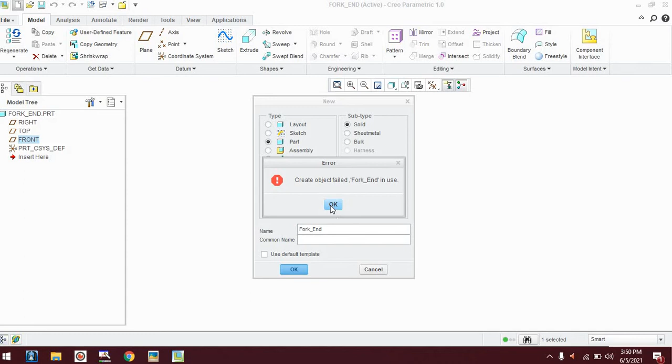So I am taking a new drawing with the file name fork end. I am not using a default template. Then press OK. So fork end 1, that's the part, and this is the MMNS part drawing template I use.

So this is the drawing screen. Here, my front plane is this one. So in that I am going to draw, because I am drawing the front view of the fork end.

Here, based on the center we can draw 2 circles with radius 14 and radius 32. So initially I am going to draw 2 circles. First circle, then second circle, and dimensions are - here it is diameter, here it is 32 radius, that means 64, and here 14, that means 28 diameter. So 64 and 28. We draw 2 circles.

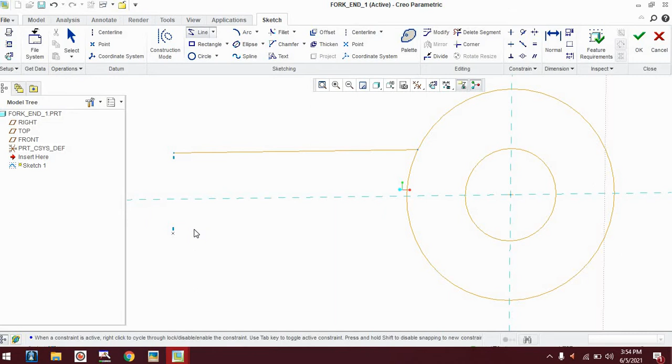There are some constraints in this, so I am removing this, and again drawing horizontal. This distance is 14. So we got two horizontal lines with the 14, and this distance from the end point up to the center axis.

This distance up to the center axis is 108. So this distance should be 108. This is the center axis, so this distance is 108.

So we can close this portion, and we can remove the remaining portions, and this area can be removed, and this area also can be removed.

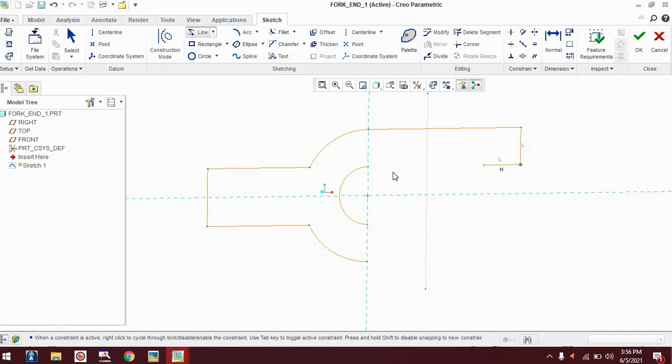So we got some portion of the fork end, and then after extrusion we have to draw a circle here. So I am extending this area further - vertical, then here. Similarly here also I am extending further.

So the front view of the fork end is completed. Then I can extrude this sketch. How much do I extrude here? It is given 28 rectangle, that means this dimension also 28. So I am extruding by a distance of 28. This is equal to 28. Then press OK. So we got this fork end.

Then in the top plane of the fork end, next I am drawing the circle. So in this fork end, I am giving some references.

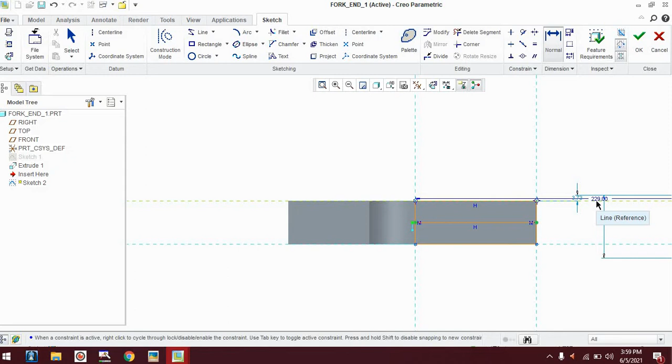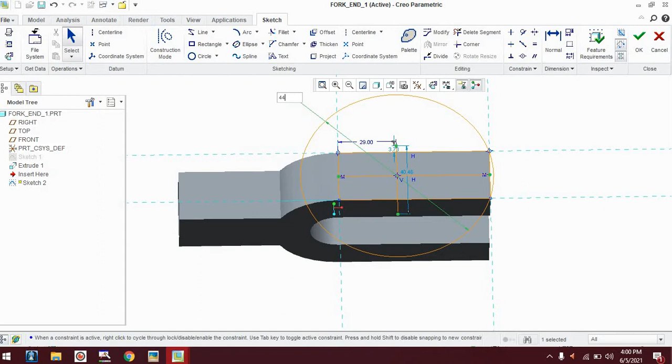Okay, so it has to extend a little bit, then only I can accommodate. Sorry, this is 48 because this is the diameter. So this is 48 now. Okay, so this is my circle.

So after that I remove the remaining components. Actually this is not good. So this is my circle. Okay, so I have the remaining portions. So next I am going to extrude the circle.

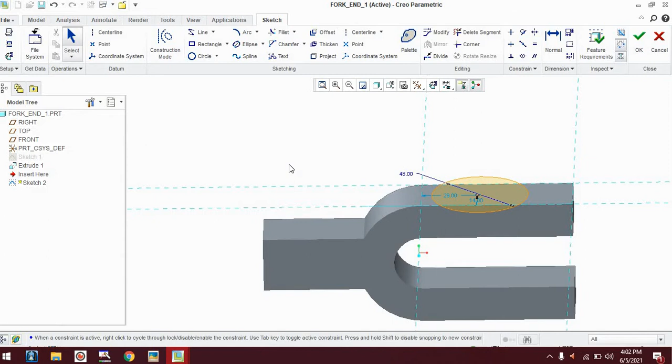So then I can extrude the circle, and the extrusion is 18. Extrusion in the reverse direction by a distance of 18. So extrude. Then after that I have to remove the extra portions from here.

For that, again sketch, then make all the edges as reference. Then draw the portions which we want to remove. Then we have a circle. So there is a circle. Okay. Then remove this area.

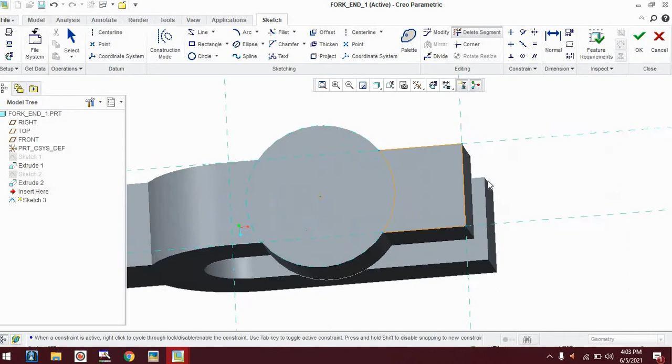So this portion we can remove. Then remove material in the opposite direction. So the bottom portion also can be removed by extending. You can remove the bottom portion also.

Okay, then this portion, this extrusion can be mirrored. This portion can be mirrored with respect to the plane. Here the top plane is the mirror plane. So use the mirror option, then take the reference is, select one item, then...

So again the extrude, this is going to mirror, select mirror, so I mirror the portion and I got the fork end.

So after that here we have some fillet. So in this I am giving some fillet by a suitable value. The same thing also can be... no, not possible.

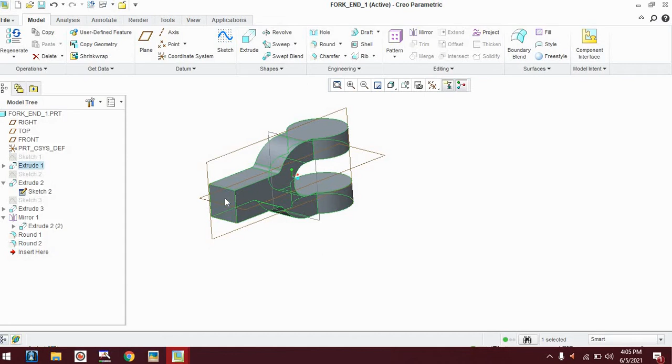Then in this end here we have an octagon shape, so we have to create an octagon there. So select this area, sketch, then here take all the planes as reference. So when we select the reference, it turns to blue, then only we can pick the exact edge.

Then from the palette we can take the octagon, drag and place somewhere, then press OK. Then using constraints, coincide constraint, select the center and select the center of...

So here the center is not given, so how to draw a line, it should be a construction line. A construction line is drawn to find out the center.

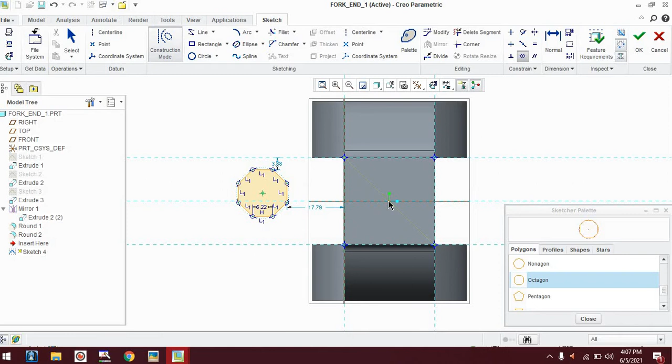Then use coincident, so I coincide into the center, then coincide this edge and this edge. So there is a constraint, so this dimension is not already given, so we can delete that dimension.

So we got final octagon. Okay, so we got this octagon.

Then we can... actually for drawing this one we have to remove this portion, so draw a line here connecting the corners.

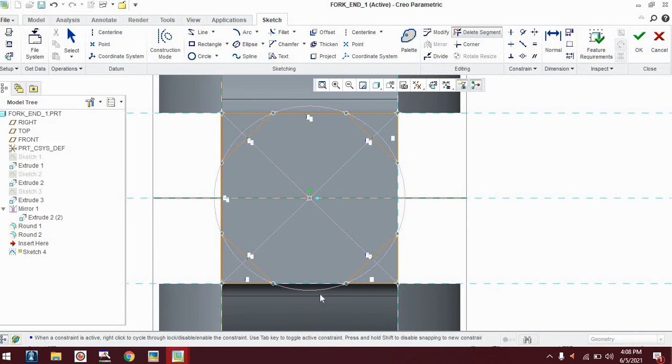Then remove the unwanted lines. So here we don't need this one, this one, this one, and this one is not needed. Okay, and this one is also not needed. So we need only the edge portion for drawing. So we got this edge portion.

Then we can press OK. See this, only the edge portions are selected. Then we can do extrude, so we can see clearly. So this is the only edge portion. So then we can do extrude cut.

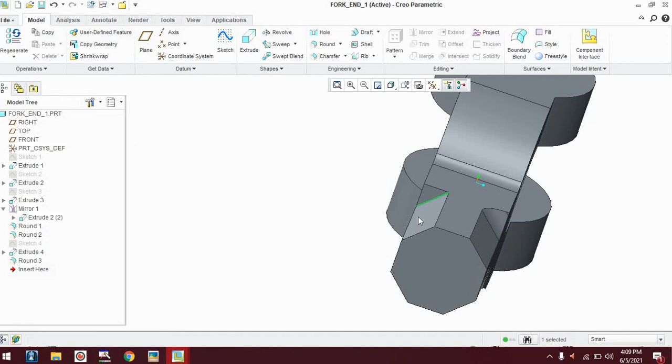And how much distance? This is up to 30. So 30 distance, then press OK. Then in this area I am giving a round fillet up to this 5.10. Then here also select this edge, okay, it turns to green, then 5.10.

Okay, so we create this portion, and if we need we can extend this some distance of shaft also by drawing a circle. So here also we don't know the exact center.

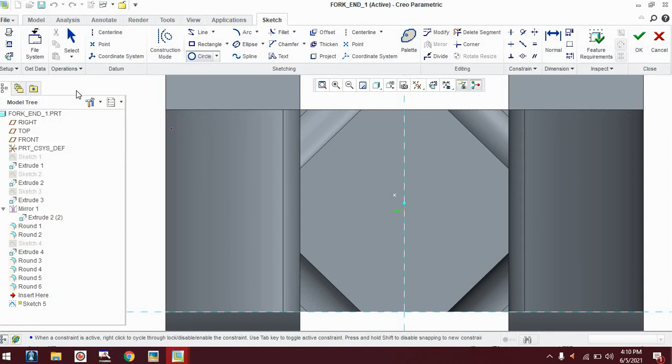To draw the center, we have to draw a construction line, so that is also not given. So one more reference is required. Okay, so draw a line here, a construction line. Then from this we can find the center. So this is the center.

So then I can draw a circle here, and this circle is actually this much.

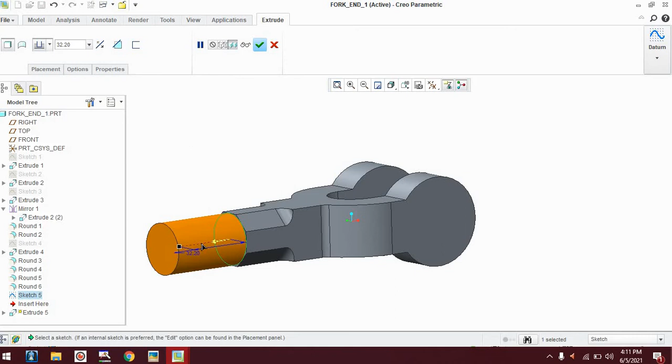Extrude by some distance not specified, then fillet this edge by pressing Ctrl. Then we can do the fillet operations here.

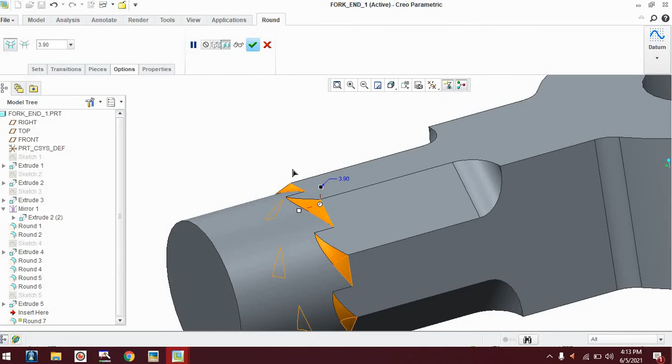Computer is a little bit slow. It's not clear. Okay.

So after filleting, we completed the fork end, and here at the center we need a hole for inserting this pin. The diameter of the pin is given as 24. This is the end of the pin, so diameter is 24, and we need to drill a hole here.

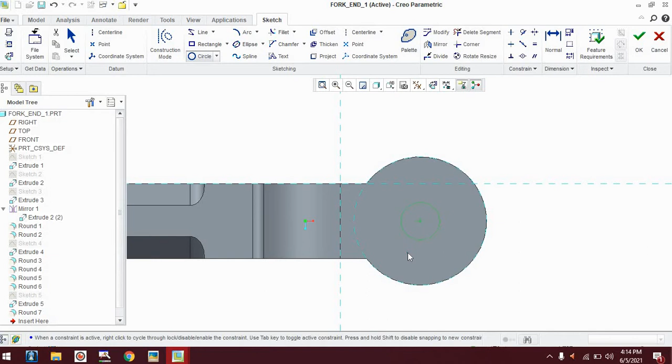Sketch. Take this as a reference, then only we can identify the center, then draw a circle with the diameter 24. Diameter is 24.

Then press OK, then extrude in the reverse direction, the total distance. Here we can give it up to the next surface. Sorry, intersect with all surfaces. So we finish this fork end.

Then we can save this document - in desktop, or in my documents. We can save this document, or in desktop, or we can create a working directory. Here I am not creating any working directory, so it's saved. The fork end is saved. Next one is again a part - Eye End.

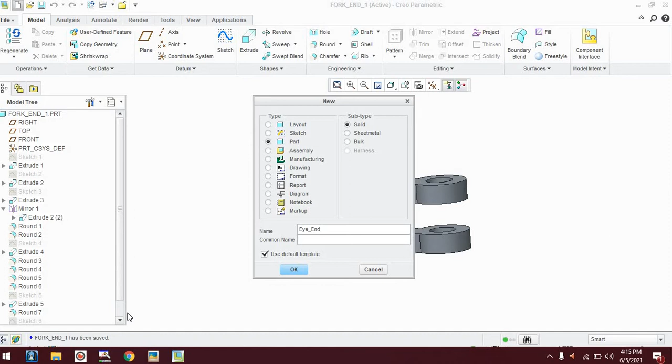Not using default template. You have to use the same template throughout the assembly, then only the dimensions are correct. Then here, select all. Then in this also I am going to draw this front view.

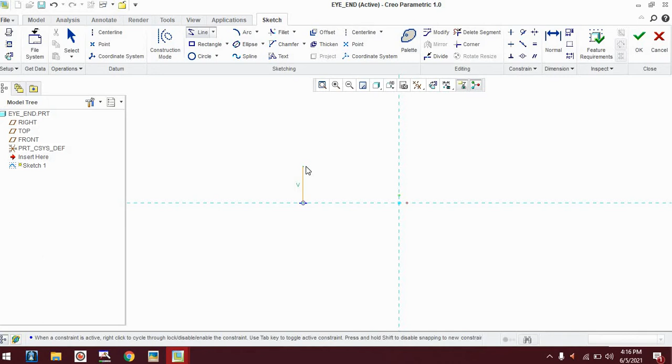So that is a 28 distance, sketch on the front view. So here the total distance, from center up to center, is 96. So we can draw a rectangle with 96. So I am taking this as a reference.

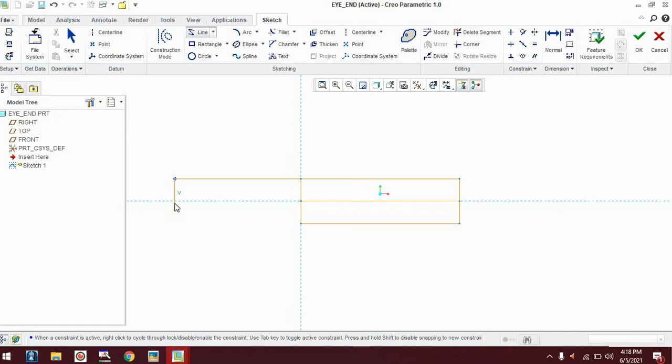Then press OK. Sorry, there are some extra lines - edit definition, so you have to remove the center line. Then only we can extrude. Press OK, then extrude by a distance of 28. Here also it's 28, so the 28 distance extrusion is over.

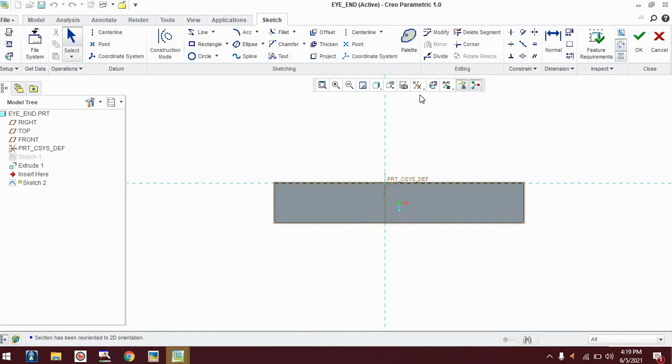Then in this top plane, I'm going to draw a circle. So here I don't know the distance.

Actually the center line is here - I think this is the center line, but we can measure it. What is the distance between these two points? 96. Okay, fine. So after 96, we extended some distance where I am drawing. So at this 96 we have to draw a circle.

So at the center we will draw a circle. I am drawing a construction line here to find the midpoint. Then change to construction mode and draw a circle with the diameter - even this diameter is also 48. This diameter is also 48. Diameter is 48.

Then we can extrude this in the opposite direction by a distance of 28. This is also 28, this distance is 28.

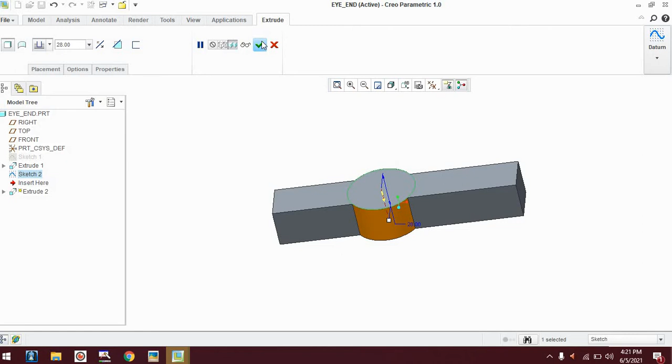Then again draw a sketch here to remove the remaining portions. Make all these points as reference - we have to make this as reference, then only you can pick the exact points along the line or along the circle. Then draw the line for removing this extra portion.

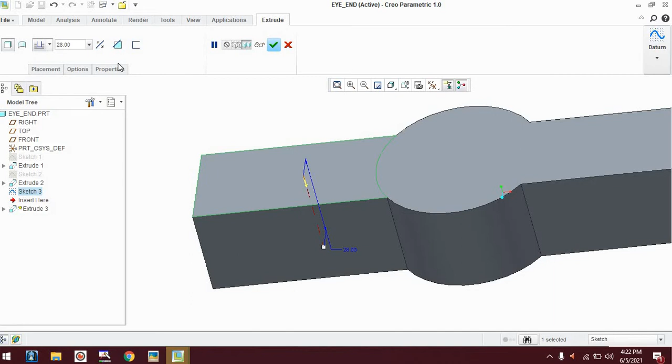Draw a circle and remove this area. So we got this area, see this. So we can remove this by Extrude Cut, up to 40. What is the thickness? 28. So we remove, and we got this portion.

Okay, and here again we have to draw an octagon. So take this plane, sketch, and again make all this as reference. This is the reference. Then draw a line to find the center.

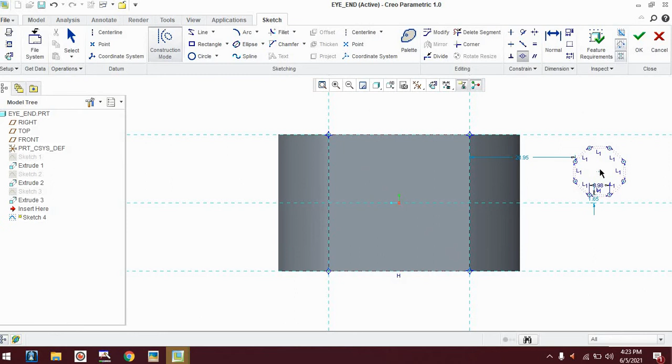Okay, it's a construction line. Then after that, take from the palette the octagon, drag and place here, then press OK. Then take the center, go inside and select this line. Again select the center, go inside this line, so it comes at the center.

Then again, okay, one thing is switch off this - first remove the construction mode, then only we can draw. Then again take the octagon, then press OK, then take this and select any of the lines passing through the center.

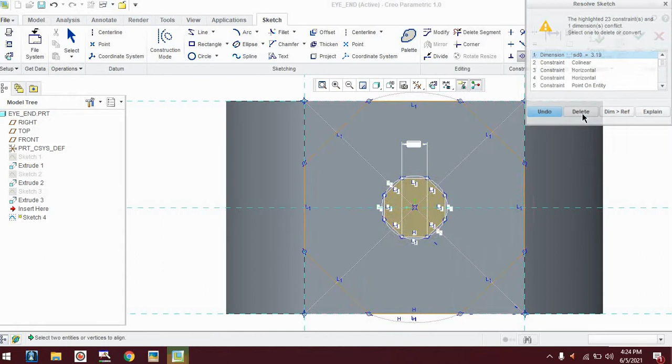Okay, sketch this place. Again take the center and take the opposite line, just come at the center, then select this line and this line. So there will be an error confliction, so delete these dimensions - we do not specify the dimensions. Delete the dimensions, so we got the octagon here.

Then draw lines at these corner points. Then maybe we can remove material from the corner points.

Then remove the segments. So we got 4 corner areas. Then press OK, and again remove material.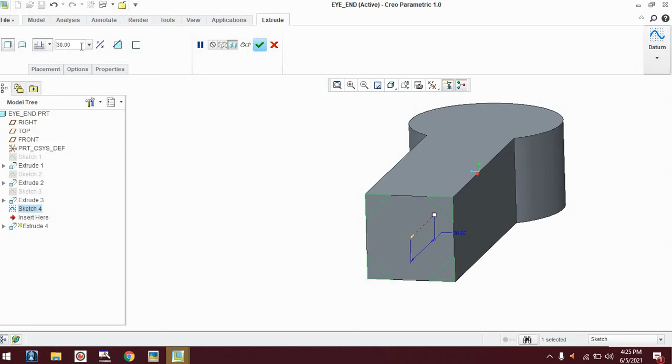Extrude in the opposite direction. This distance is 30, so give 30. Remove material, 30 distance. Press OK.

Then take these 4 edges by clicking Control. You can select 4 edges together. Change to green. Then round it. Oh, it's not possible. Okay, round.

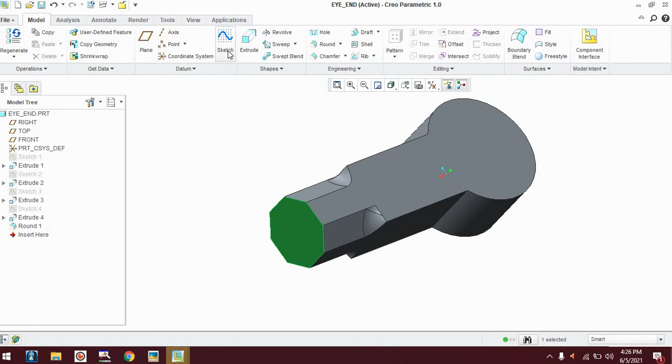Then the distance is 6.10. Okay, 6.10. Then again select this plane. Then we are going to draw a circle. So here also we have to find the center. Make this as reference.

Cross line here. Then draw a circle here. Okay, and extrude up to a distance.

The distance is not specified here. Then on the top area we have to drill a hole. Sketch. So the dimension of the hole inside this will be equal to the diameter of the pin, that is 24.

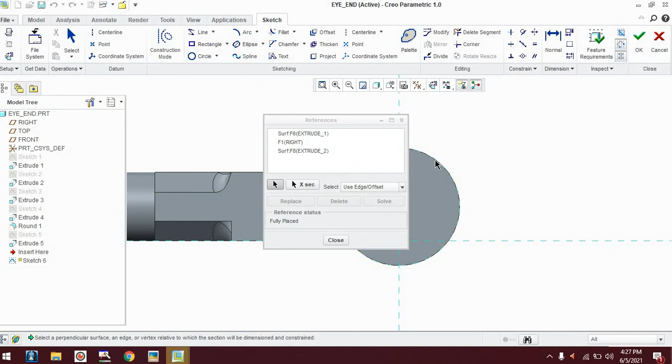So here again make this as a reference. Change to blue color. Then select the circle. This is equal to 24. Press OK.

Extrude. Then extrude cut in the reverse direction, up to next surface. Okay, so we got the second component. End and save the next component.

End, again I am saving in desktop. Second component is over. Third component is the collar.

Again new document, part, default template. It's not default template, then here I am taking this. So throughout the assembly you have to select the same template.

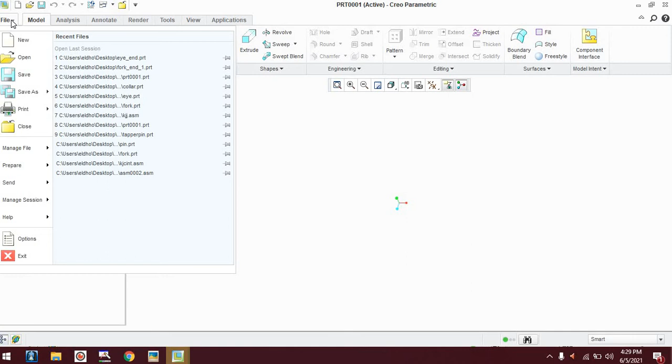So here in this I am going to draw this one. Okay, this pin - sorry, not collar, you can draw the collar. Okay, so I forgot to give the name. It's not possible, so I am taking a new drawing. So closing this for collar.

So here I am taking default MM as template. Then in this collar, this is actually I am drawing the circle which is the top view. This is the top view. So I am going to draw a circle in the top plane.

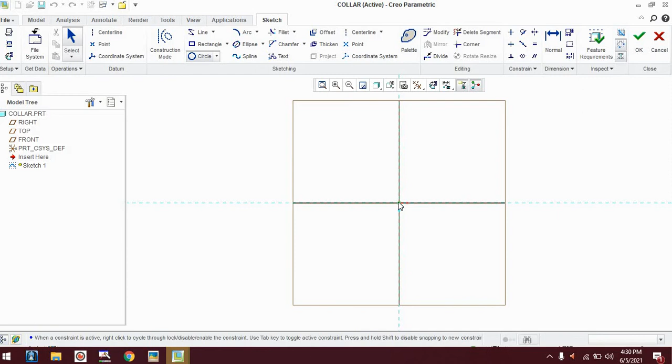Sketch in the top plane. So the circle diameter will be 36 outside diameter and 24 inside diameter. 36 and 24. This is 36 diameter and this one is 24 diameter.

So we got two circles. Then extrude, and the extrusion distance is 12 mm thick. 12 mm thick. So we got the collar. Save again, collar part. Collar is saved.

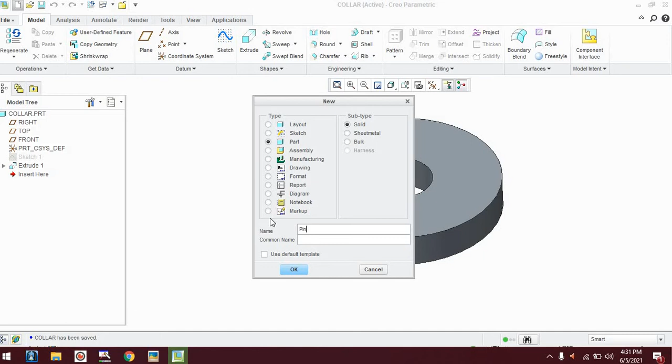Next part is again sketch pin. Pin. Okay, then select the template. So in the pin again I am drawing this top view.

So this is 24 diameter. Pin is actually I am drawing. So take the top view, sketch. Okay. Then to extrude to a distance, we have to calculate this distance.

And the total distance is equal to 6 plus 12. Total dimension of the length of the pin is equal to 6 plus 12 plus 18 plus 28 plus again 18, plus this is 12 mm, so 12 - total 94.

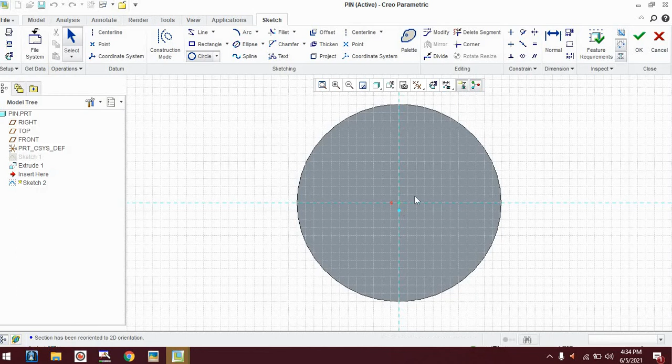Then at this end we are going to draw the head. Sketch, and head is also a circular one. See this head with the 36 tall thickness. So draw a circle with 36 diameter, 36 diameter, and extrude.

12 thicker in this direction, 12. So we complete the pin. And one more thing, inside the pin we need a hole for this taper.

And that taper is 5 mm, 6 mm thickness. So we have to calculate this taper dimensions. For that,

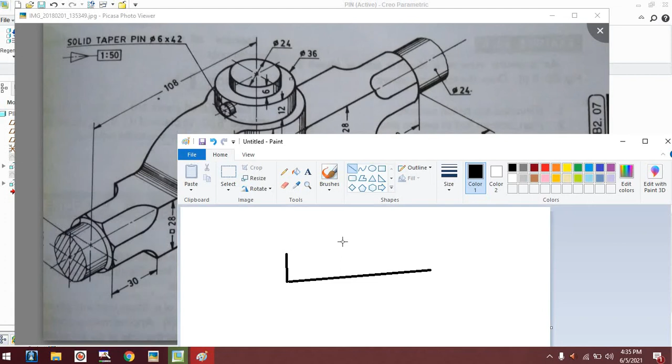So this is my taper pin. I'll show the cross section of the taper pin. Okay, this is the taper pin, and here the diameter is given as 6. So this is 6, and the length is given as 42.

This is 42. And the smallest diameter we have to calculate from this ratio, 1/50. The formula for this is capital D minus small d divided by L equal to the ratio, that is here 1/50. So 1/50. Okay, so here capital D is given 6, and length L is 42, and small d is what we have to calculate using this formula. So by calculation we found out that this is equal to 5.16.

Okay, so for this taper pin, 6 and 5.16 are the dimensions. So we have to make a hole with the lowest dimension. Then only we can make a mating with the interference joint. So here I am making a hole with 5.16 diameter.

So here, what is the distance? Actually the distance should be at the center of this column. That means here it is 6 and this is 12. So half of the 12 is equal to 6. So 6 plus 6 is 12. So from the top, 12 distance.

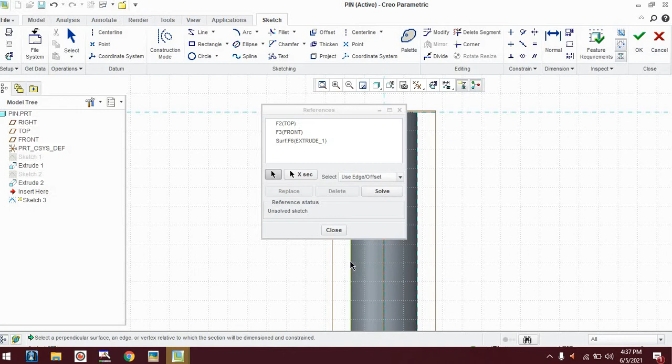So for that, here I have to draw - first check the available planes. So here, passing through the center, we have a plane. So in this plane I can draw a circle that is passing through the center. So again, make the references, cross, then draw a circle, and it is 5.16, the smallest diameter, and this distance is equal to 12.

Okay, so we draw a circle at the center, then extrude in both directions. Here we have an option to extrude in both directions and remove material, and the diameter is 24. So here, 24. We got a hole here.

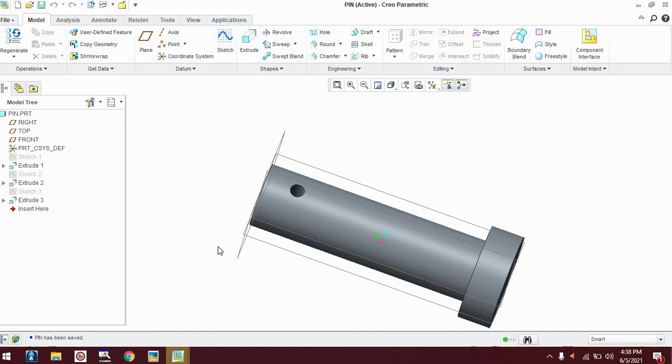Okay, so we complete the pin also. Save again in the desktop. Save the pin. Then one more component, that is a taper key, taper pin.

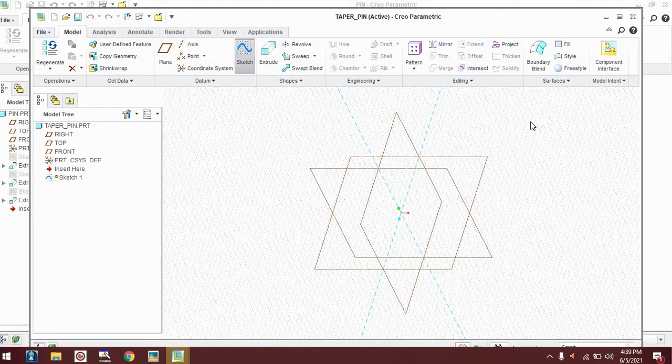Okay, so space is not allowed, so we have to give underscore. Then again the template. So here I am drawing the side view, I am drawing the circle, which is the side view. So take the right side plane, sketch. You have to select the proper plane for the components, because during the assembly process these planes actually intersect.

So we have to select the proper plane from the drawing. Coming to the taper, already explained. Maximum largest diameter is 6, smallest one is 5.16, based on this ratio, taper version. So this is equal to 6. And okay, then

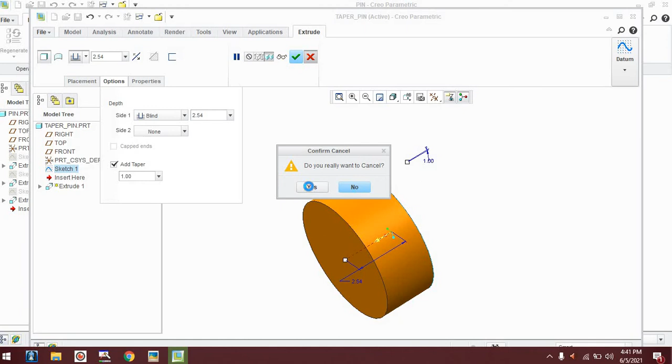Extrude. There are different options available. Here we have an option for tapering, but add a taper, and here it is angle. So using this formula the angle is not given, so I am using a separate method, another method for drawing.

So here I am drawing this taper using revolve. I am drawing this front portion. Okay, so take front plane, sketch. Then I am drawing the front area of the taper, and using the revolve feature we can make the taper. So this is equal to 6, half of 6, that is equal to 3.

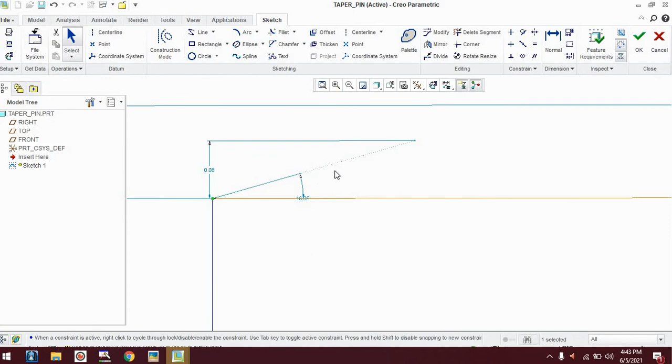This is half of 5.16, that is 2.58. And then this is 42, and here I am drawing, sorry. Okay, here I am drawing a line with a dimension. So here it is 3, here it is half of 5.16, 2.58. Then draw a line connecting these two. So it's actually a tapered one.

Then we can revolve. We have a revolve feature. Revolve. So select, sorry, forgot to give the center line. So edit definition. We have to give the center line also. So this is my center line. Then only I can revolve.

So we give the center line. Then we can revolve, see this about the center line. We revolve, and this is actually a tapered one. See this, this is the higher end, and this is the lower end. We save the components, so we finish all the components.

Then we are going to make an assembly. So in this, here this is the assembly, and this is a knuckle joint. And here again I am using the same template for assembly. So this is the assembly window, and in this window, using this icon I can retrieve the components.

So from the desktop, first I am calling fork end and open. So this fork end actually, here also we can give the plane also. So this is the plane. Okay, we finished, press OK.

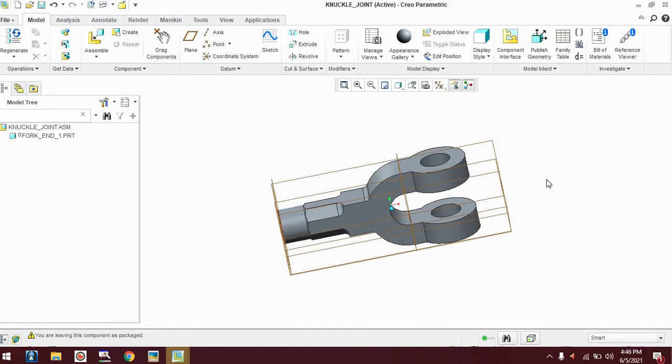First component is okay, now mating. And the second component I am calling is eye end. Eye end, open. So in this end, here I switch on all the axes. So I am going to mate the center axis of this end with the center axis of this fork end. So here we can see the center axis of this end. Click on the center axis of the eye end, then click on the center axis of this fork end.

So then the default one is distance, but here I am giving coincide. So here we can see some of the constraints are applied, the degrees of freedom are constrained, so it can move only in this direction, and the rotation. This rotation is also possible. Here I am not constraining this rotation because in knuckle joint application some flexibility is allowed for this rotation. So I am not constraining this rotation, but we have to constrain this movement.

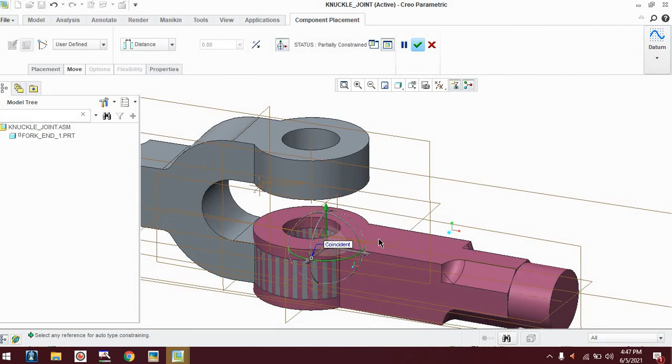For that, select this plane and the inner plane and give the coincide. So it automatically selects as coincide. So it's fully constrained, but we provide some rotation. We are not removing the rotation degree of freedom. Rotation is possible between these two components. Then press OK. So we mated the second component. Then the third one.

This is the pin. This pin also we can mate with the axis. Select the axis of this pin and select this axis, and here again the coincide command can be used. So here we can see the pin is moved, and only this movement and rotation movements are possible.

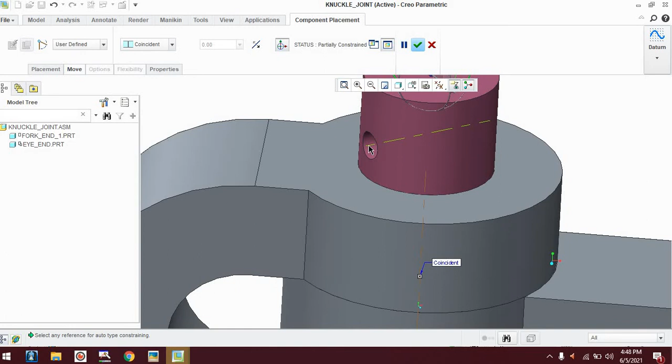So here I am rotating. We can constrain this rotation by selecting this center axis and the center axis of this shaft, and make this parallel. Thereby we can remove this rotation, see this rotation is arrested. So only the possible movement is this one, and that is also arrested using coinciding these two planes.

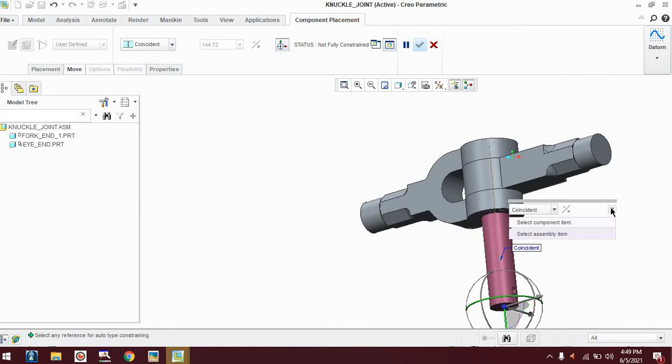I am giving coincide. Sorry, it's reversed, so we have to remove this. To remove any mating, just double click here and remove these two matings. So this movement is possible, and by removing this, it is also removed.

So again we can create a parallel mating between two components, oriented so this changes to parallel. Then we have to give the constraint for this. Select this plane, select this plane.

Maybe this plane, sorry, pin edit definition. There's some problem in this parallel mating also.

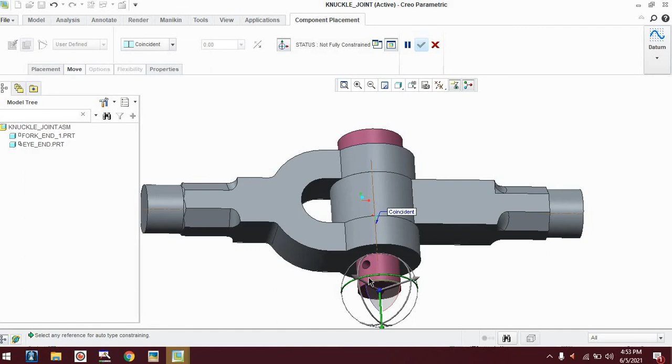So we have to remove this again, because when it's fully constrained, we cannot do any other mating. So initially we have to do this mating, we have to arrest this. It's not compulsory, but it's okay for proper positioning. So we can select perpendicular. Always it will be perpendicular, it's better this one.

This and the axis of this one. It's not oriented, this is parallel. Now it is parallel.

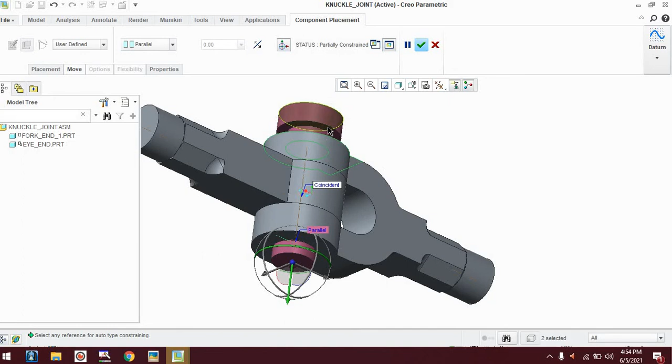Then it will be coincide, the reverse direction. Okay, it's fully constrained. This coincide here in between these two faces, and this axis and this axis are parallel, and these two axes are coincide. It's fully constrained.

Okay, then again retrieve the collar, open collar. I think the dimension is different. Collar dimension is changed, so this is the center axis. We can see the center axis of this collar, so this is the center axis.

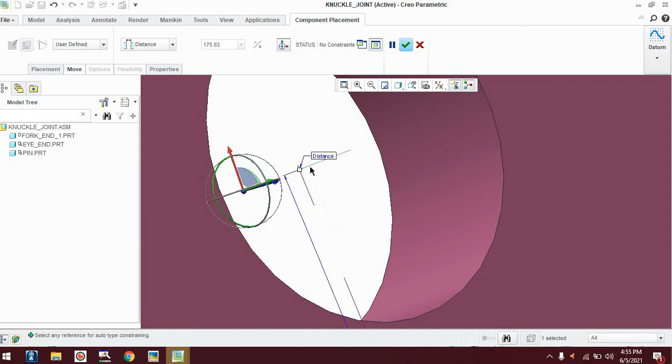That is again coincide. I think the collar dimension is changed, it's not a problem, we can change the collar dimension. Then again the coincide, this surface and this surface coincide.

But we cannot. And one more thing is that we have to make some hole on the collar also. So we completed the assembly. It's not possible, it's not. Then after the assembly also, we can edit the components.

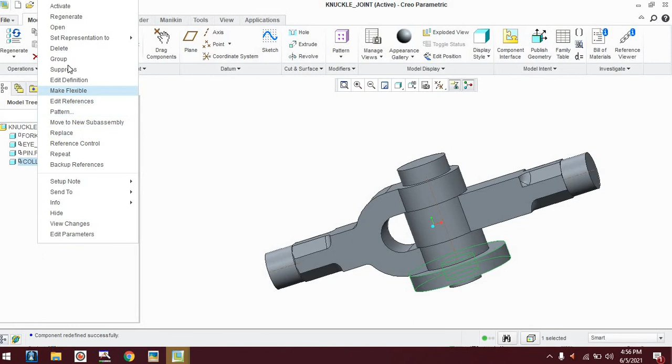Just go here and right click, then edit, activate, edit definition. It's not edit definition, then edit reference pattern. Open. So this collar is open.

Here we can edit, any editing will be automatically reflected in the assembly drawing. So some dimensions are different in this collar. Its dimensions are 536 and 24. It's 536. I think this is 36.

Actually that was the radius, this is actually indicating the radius. So this is the collar. Okay, so this is the collar, and again we have to give a hole through this collar.

For that, select the planes, one plane will be passing through the center. Here this plane is passing through the center. Sketch. Then make all these things reference.

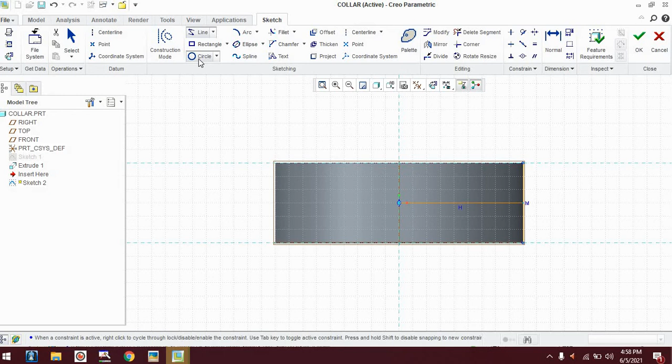Then draw a circle. The circle diameter is 5.16, that is the diameter of the smallest diameter of the taper, 5.16. Enter. Then remove these lines.

So we have then two sides, remove material, and the collar is 36. So here we give the distance 36.

So you got a hole here. Then just save here, collar, okay, then close. So it's automatically, you can see the hole. So it's automatically changed in the assembly view.

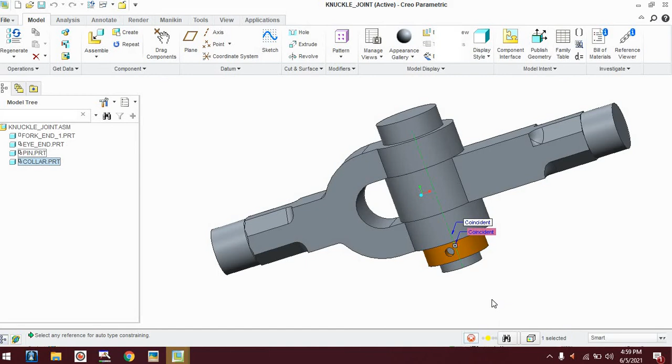Okay, but the hole is not right, we have to edit this mating. So edit definition, we remove, because the hole should be visible. So that is also okay. So we have to, rotation is possible.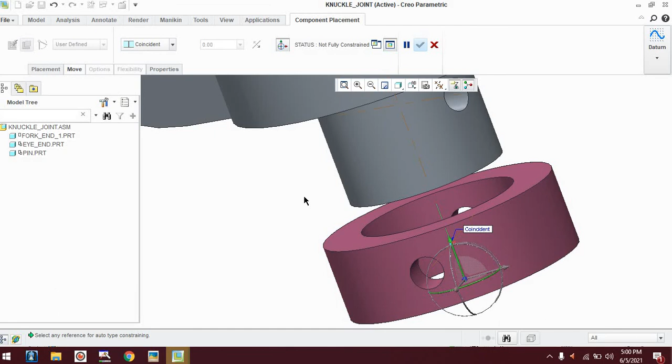Before this, we have to give the axis coincide. So I remove all the constraints, then take this out and give the first constraint, this one, the center axis. The center axis of this one and the center axis of this collar are mated by coincide. So we got the first.

Then the second one is this one, the center axis of this hole and this hole should be coincide. So then it is fully constrained, so we can see the hole. Okay, we can see the hole here.

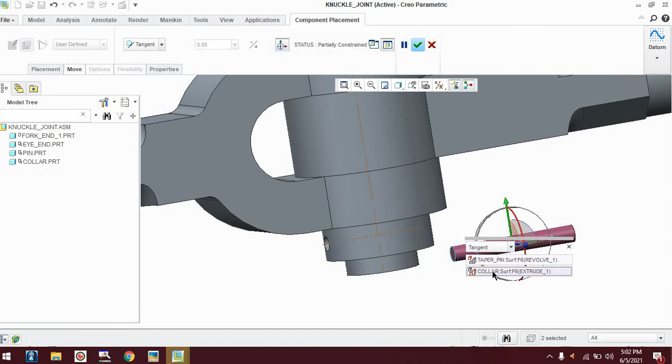Then through this hole we can insert the pin, taper pin. Open. So it's very simple, just coincide the axis. Then select this face and select this face. It's not tangent, and it's only possible tangent because one of the faces is a curved face.

So we have to remove this and select any other. So we can give the distance. For that we can give this face, and we give distance. Some problem, remove all the constraints.

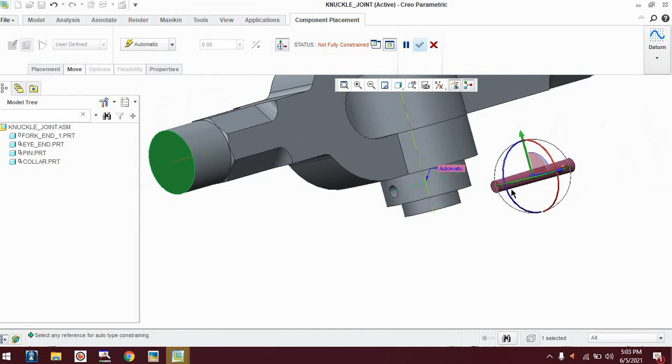So first constraint is the axis constraints. Axis is not visible. Both are coincide. Both axes are coincide. It's not coincide. So this axis and this axis coincide. Okay.

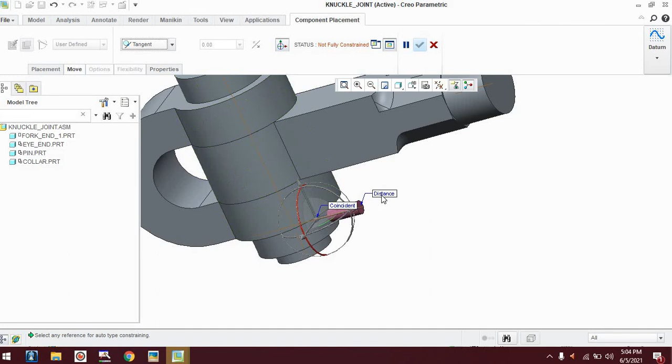Then we can give this plane and select this plane and make a distance, think some distance. So by providing distance we can constrain that, but distance is not specified.

I think the computer is slow, that is why it is not moving.

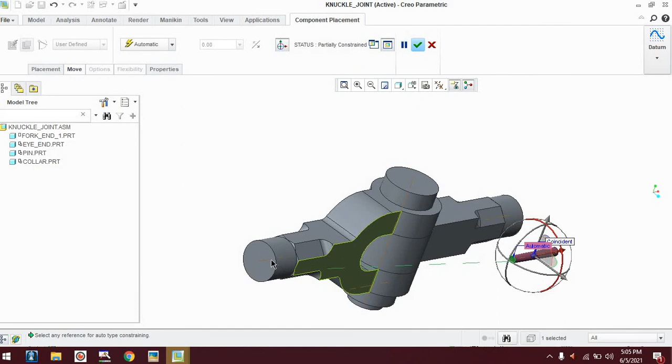Remove this, again retrieve the taper pin. So it's very simple mating, but the computer is slow, that is why it takes time. So take the center, and take the center of this, and give the coincide command. So both are coincide. Then give this surface and this surface, give distance. So okay, now it is okay. Then just drag through the hole. Okay, this is okay. Okay, the two ends are visible. Then fully constrained.

So this is the assembly of the knuckle joint. And after the assembly this is the isometric view, standard orientation, and better view is this type.

Okay, then we can do exploded view. For that, here we have an option exploded view. So by touching the exploded view, then edit position, give edit position.

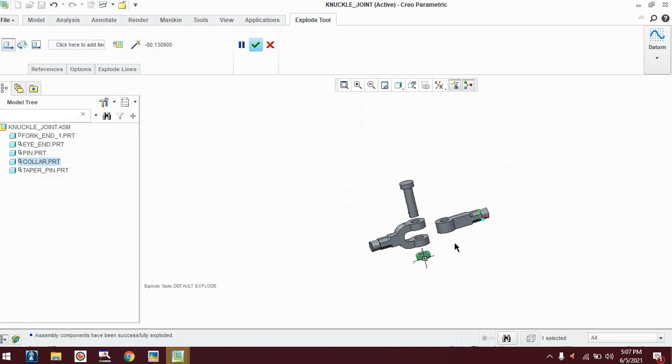That is a taper pin. Okay, taper pin. Okay, this is the edit the position again. Taper pin, we have to move the taper pin. This is actually should be in the sequence of how these components are assembled. Okay, anyone should understand how these components are assembled by looking on this exploded view. So it should be clear. So just by moving this pin in downward direction, collar here, taper pin here. So this is the exploded view.

Okay, then just click. Okay, so see this. This is the exploded view of the final assembly. Then we have bill of materials. See this bill of material. And actually here we have 5 components, and how many quantities of these components are used for this assembly, and what are the name of these components, and all these details will be available from this assembly.

In a company, for example, while manufacturing a car, there are thousands of components. So the entire details of these components, quantities of components, etc. will be available from this bill of material. So just click top level or sub assembly, we can select it. Then click OK. We will get the BOM report. So in this knuckle joint we can see there are 5 components and the quantities are single. Each component is only 1 unit, and by clicking on this we got corresponding file. So this is the bill of material of the knuckle joint.

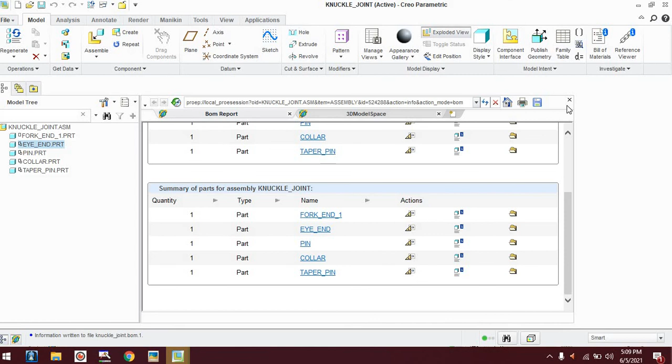So by this way we can create the bill of material, and this is the exploded view, and we can change the appearance using this tab. Different colors we can provide, and that is about this assembly.

Okay, I think I finished everything. It's not needed.

Okay, then we can create the drawing based on this assembly. For that, new, then drawing. Again you can use the, so this is again knuckle joint. Drawing. Okay, re-enter. So here also we have to give the space.

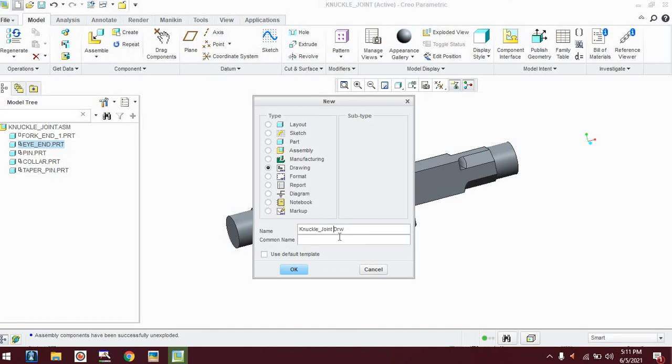Okay, then landscape we can create. Already explained what is the, we can use any templates or empty sheets. We can create the drawing. Here I am using a template. Use template. F4 drawing.

It's okay. So this is the drawing, and if you want you can create the drawing according to your style. For example, create drawing with the empty landscape, then press OK.

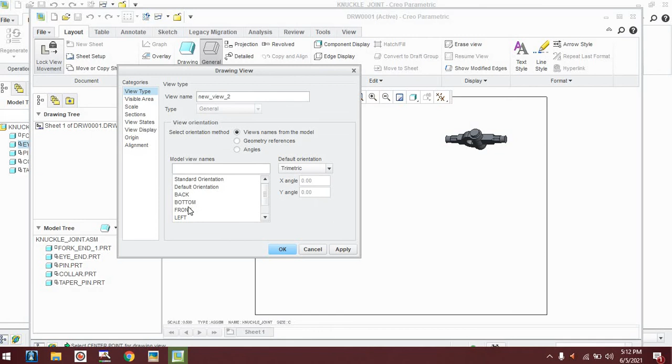Then here you can create drawings, and click general, not combined, OK. Then click the left mouse button. If you want to position here, click here, click here, left mouse button. So first you click general, then non-combined state, then left mouse button at the position. Then we can see the front view. Apply, and we can scale also. There are different options available here. Custom scale, we can give 1. Apply, close.

Then again general, then top view, scale. Sorry, first we have to apply the top view, then scale. Here also I am giving 1. Apply, close, general.

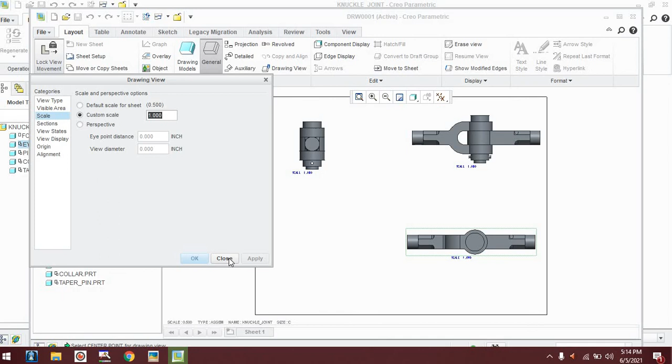Okay, side view, front, apply, scale, custom scale is 1. Apply, close. And if you want the isometric view, then that is also again add here.

There are different types of views available: trimetric view, isometric view, user defined views, etc. And here also we can scale. Here I am giving 1.5, 1.2. Higher size. So close. Okay.